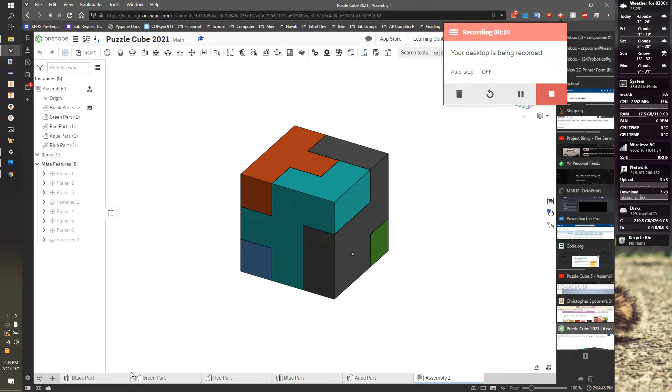I'm going to be consulting with this. I'm going to start with the black piece again, a nice centered piece, and the key here is how I'm going to build it. So this is my origin, this is going to be my front, this is going to be my right-hand side. Front, right side. So I'm going to start my black piece on the right-hand side.

I'm going to start my sketch on the right plane, and flip my stuff around so you can see it. I'm going to start by drawing this piece right here, this 4. Let me try that again, make sure I actually pick up the origin. Now I'm going to draw this section here, which is pretty much that.

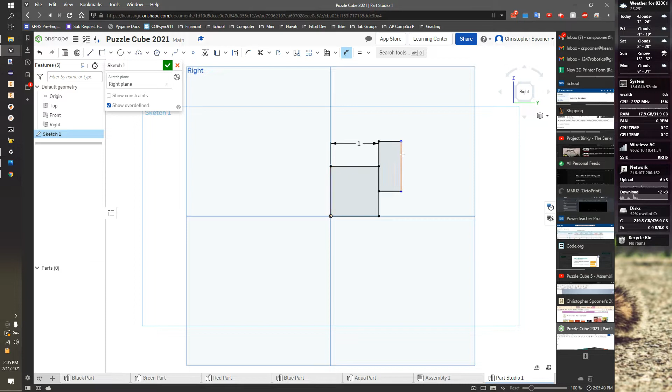I'm going to hit E for equals. I know this is equal to this, and this is equal to this. D for dimension, 1, and then this should be 0.5. I must have picked up this midpoint, so it positions correctly.

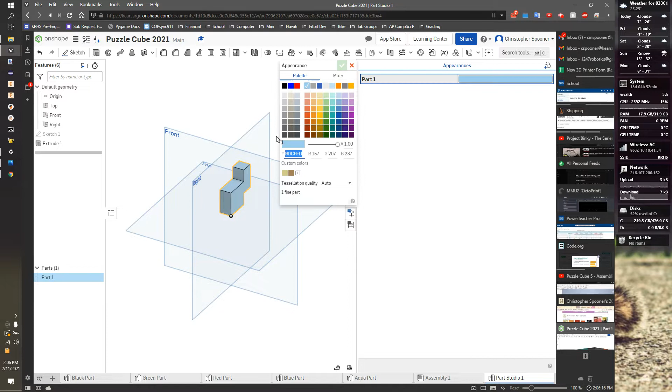I'm going to go back to looking at that front top left-hand corner. Shift E for extrude, going the opposite direction, 0.5. Before I do anything else, I'm going to set this to be black-ish, and rename this part studio.

Cube at once. I'm going to rename part 1 to be black part. So like before, this is what I was getting at about the fact that there's 2 places to name your pieces. I still have to finish the black part.

I still have to add this little extension, so I'm going to flip it around so I can see the back of there. Start a sketch on the surface. I'm not going to bother rotating, but I am going to hide this.

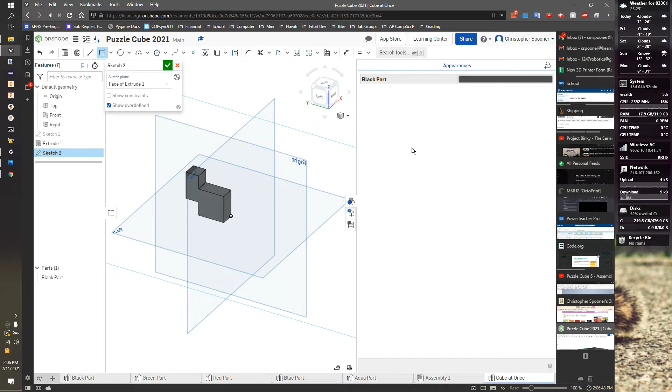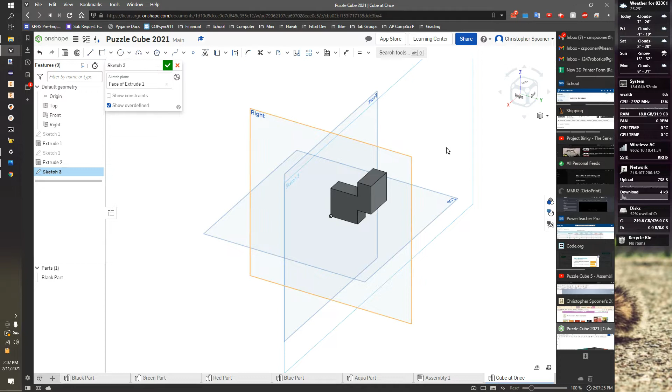I'm then going to go look at this side quickly. Nope - yep, that's the back side because it's the front, so it's just the back. This is the left. So I'm going to draw a rectangle like this.

Control Z, I missed - I want to start on the origin. I'm going to grab and go like this. I hit E for equals. I know this is equal to this, and this is equal to this, and it picked everything else up for me.

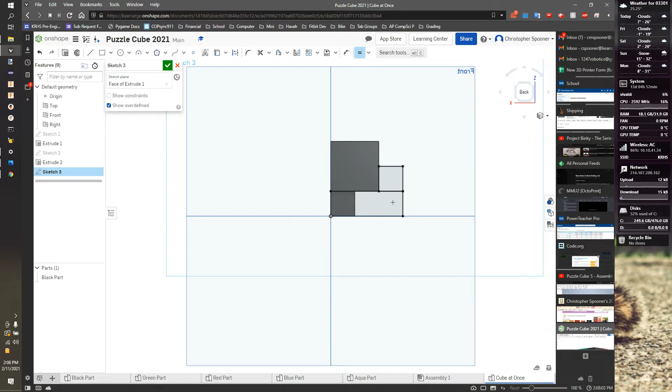Now here's the trick - I'm going to go back to my main view. Hit Shift E for extrude. I'm going to flip the direction so it's going inside of itself, and go 0.5.

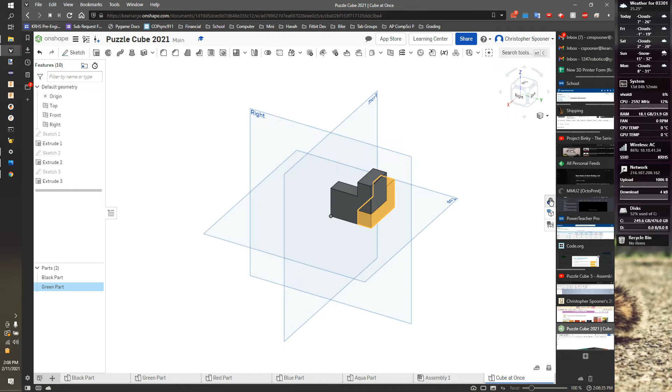Now at this point, it's going to switch you to add. I want to make sure it's new, because now that's a new piece. I'm going to rename him green part. The advantage here is I'm getting the assembly done at the same time as I build the pieces, but they are each their own individual pieces.

Hide this - now I can keep going. If I go back here, maybe I'll start the red piece now. So I'm going to start a sketch this time on the top surface. Again, I'm going to look down at myself.

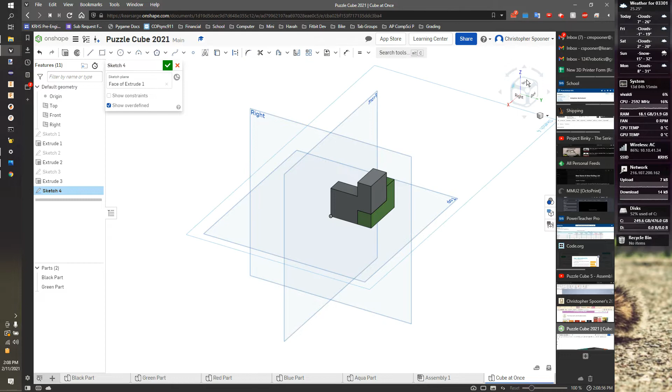I'm going to rotate this that way - that way it's sort of the same way I'm looking at it. I'm going to draw a rectangle from here to here, from here to here. And it did pick up one spot, which is good.

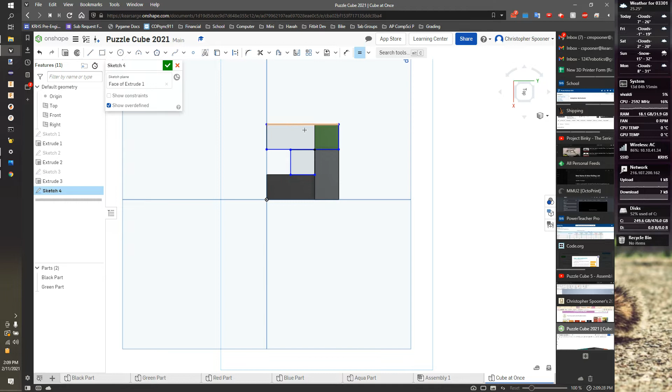I'm going to hit E for equals. I know this line here is equal to this line here, and this line here is equal to that line there. I know this entire thing here is 1.5. I know this is 0.5, and I know from here to here is 0.5.

Oh, so I was over constrained. At this point - oh, I didn't connect these. I'm going to use a coincident and say this point lands on that line, and everything turned black. The dimension's already known because this is locked to this point.

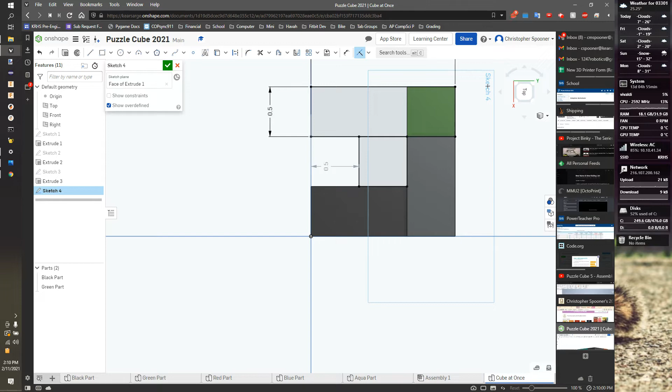I'm going to go back to a 3/4 view, Shift E for extrude, point it in the right direction, make it 0.5, and go back to my drawing.

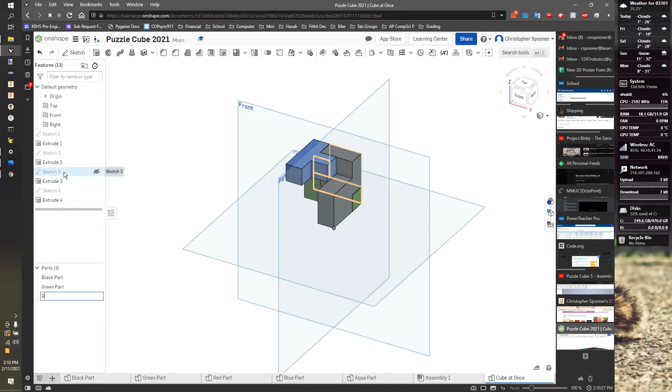The drawing looks good, I'm going to hit check. I'm going to rename this guy red part, and change his color to be red.

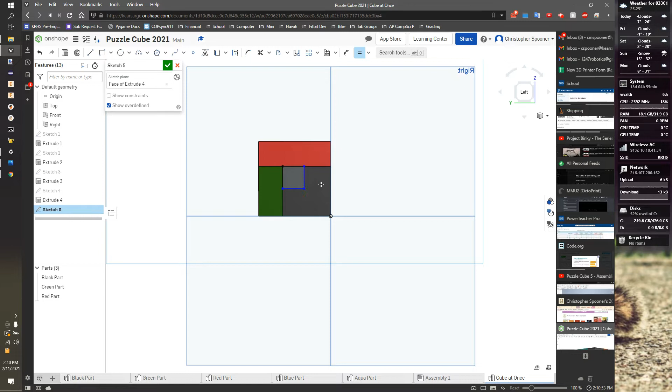Now I have to go add onto this guy, so I'm going to start a sketch on the front of the surface. Look at what I'm doing. Draw a square here, hit E for equals, I know this is equal to this, and dimension, D for dimension, 0.5.

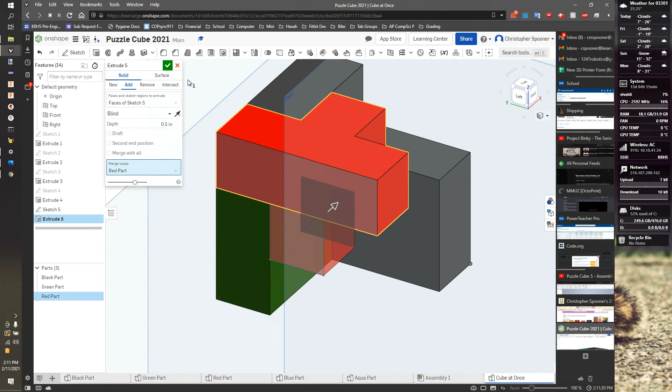Now this time is a little bit clever. I'm going to hit Shift E for extrude, go inwards, hit add, and I have to tell it what scope to merge, so 0.5. It looks like I picked the right merge scope, and I'll tell it to be part of that part. The merge scope tells you what part it should belong to. So all my pieces are being built in situ, which means my assembly is done at the same time.

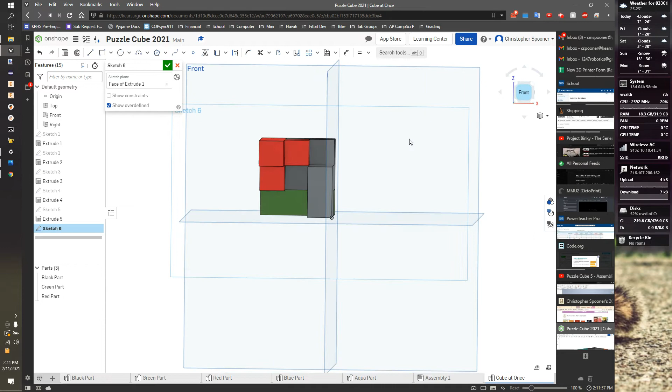All right, next part, I guess we'll do the aqua part. I'm going to rotate myself so I'm looking at the front and right. I'm going to start my aqua piece, start a sketch on this surface, then turn myself so I'm looking at it. Maybe in this case I'll actually leave myself in a 3/4 view because it might be easier.

I need a wide rectangle that goes from here to here. I need a square that goes from here to here, and I need two squares that go from here to here. I'm going to hit E for equals, I know this is equal to this, and I know this is equal to this. No dimensions needed because I built off things that already exist.

Shift E for extrude, 0.5, make sure it's a new piece. Oh, change direction, make sure it's part of new. Hit check. Before I do anything else, I'm going to change his color so that he is sort of an aqua color.

Rename this to aqua part. That's the same as clicking down here, it's the same thing. See, both updated. Hide this.

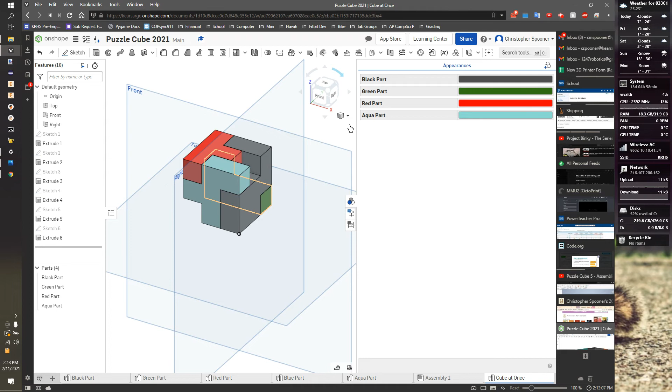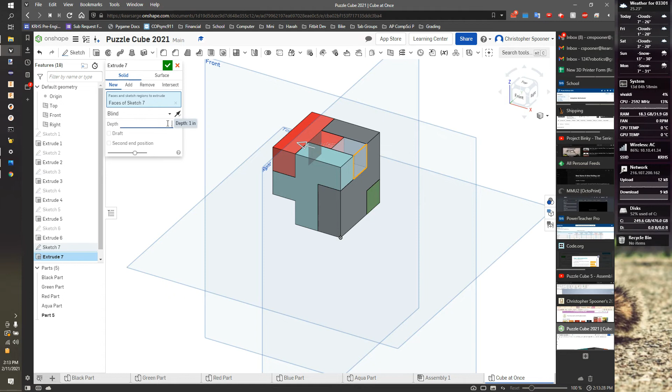I need to make a sketch on this face here. Again, I'm not going to bother rotating things because it's actually more confusing. So this corner to this corner, it turns black because I'm already referencing stuff. Shift E for extrude, I'm going to go opposite direction, 0.5. And I'm going to say add, merge scope, the aqua piece.

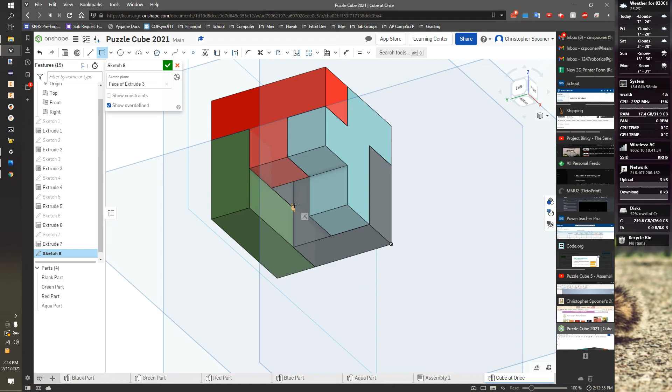And there we go, now I just need to make my blue piece. So this one, I'm going to start on this surface because that's going to be easier. I start at the bottom, it's going to be hard to see where I'm working. I'm going to start a sketch on this surface here. I need a square that goes like this, see if I can get to pop, and from here to here.

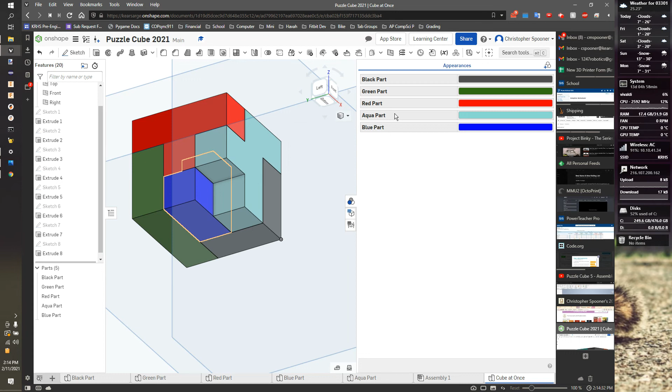They're all black already, so I'm going to hit Shift E for extrude, 0.5. It's a new part, check. Before I do anything else, I'm going to change this color to be like a really blue part. Change the name to blue part. And then I need to start a sketch on this side right here.

From here to here. Again, because I'm already picking up things, I don't have to dimension everything. Distance 0.5. Add, merge scope, the blue part.

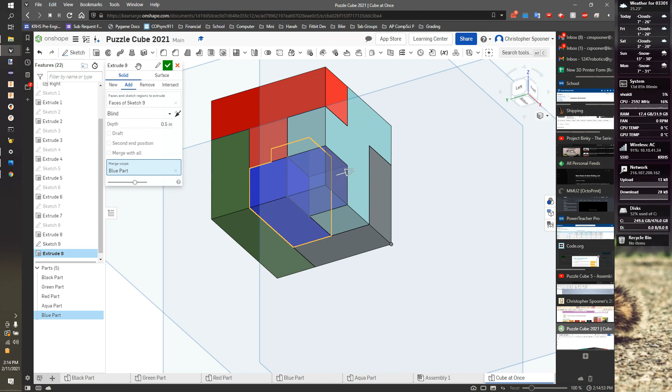So this will make our piece exactly the same way. The only difference is that I've built all the pieces in situ. The advantage to that is I didn't have to dimension a lot of stuff I was doing. However, they are all part of the same timeline. I could do the pieces out of order this way, do parts and then come back and add parts to the things, because I think it's more confusing. I didn't have to do assembly because the assembly is built all at once. So it's sort of six of one, half a dozen the other.

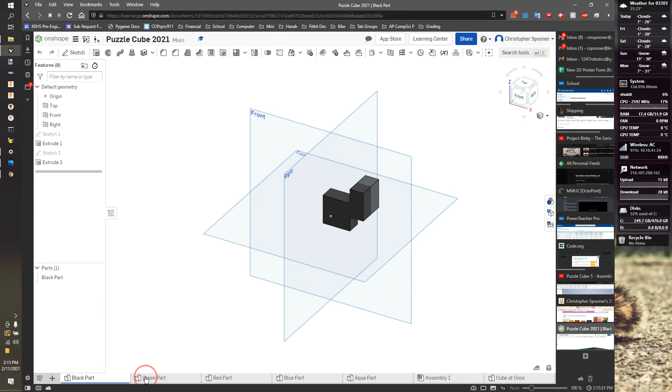I think doing the parts individually is easier. It's better practice for dimensioning and sizing and then assembling them. But this is another way of doing it.